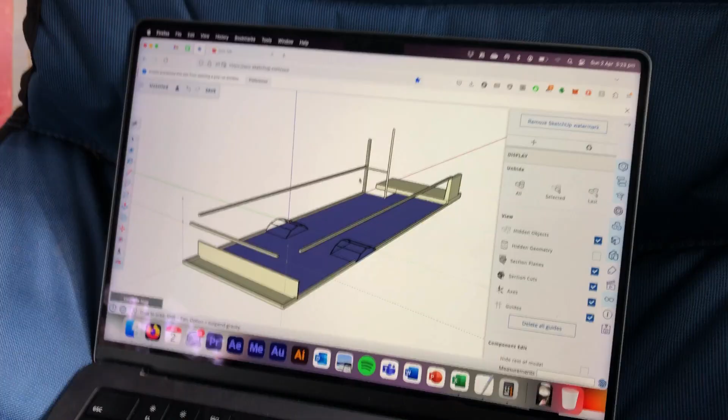So I've been busy, but there hasn't been that much to film. I've just been crawling around on my hands and knees taking measurements. What I've ended up doing is actually started to make a model of the bus for the floor plan. I'm not drawing the existing bus, only the features I've got to work around, such as the wheel wells here and the steps. The rest of it is all going to be framing. I've put in the roof ribs. I think this is going to be super useful.

Good Friday, Easter long weekend. The weather has turned very wintry, so the main thing we're going to check now is whether the bus is still waterproof.

So far, so good. Hang on, oh what? Let's see where it's come from. Water there as well. Alright, well, two spots, got one in the middle, one in that corner. Front's good though, that was really bad before, so that's a win.

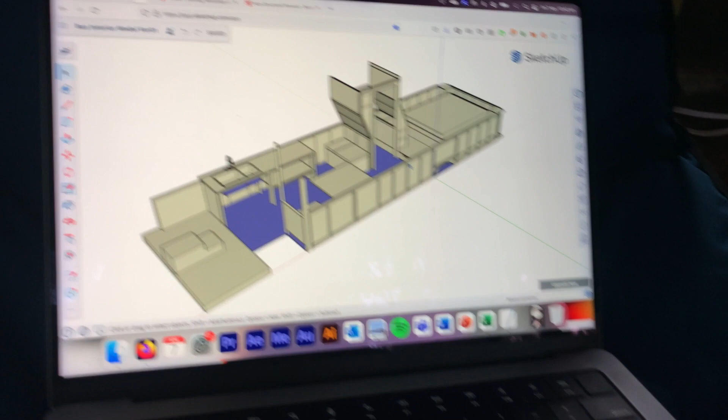So the main aim today is to double check and cross check the model I've been working on all week with the actual measurements of the bus, just to make sure all the timber we've got to order is going to fit properly. It's just going to be a case of going through this bit by bit with a tape measure, and accounting for it all in a spreadsheet. Very dull, very boring, but necessary.

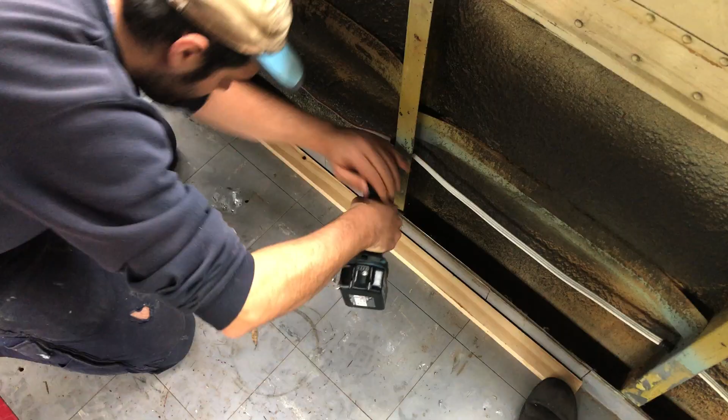Alright, so that's it, full day's work. What did we get done? Just that - the rarest piece of timber. All we could find was one piece of 42 by 30, which is what I've designed in for the entire floor plate and top plate for these walls. We went to five different hardware stores, none of them have it in stock, just one piece. So that's the day, and I guess we've got to wait until we can get some more.

So even though we could only get one length of this, we did manage to get all the 30 by 30s that we need. So this will be all the uprights right along the wall, and all of this as well, which is the 1745, and this will be the frame for the bed, the whole bed area. So semi-successful, but we can't start cutting this up until we've got the top plates in, which of course is the 42 by 30. We'll have another one of these up here, and then the uprights will fit between.

So we've got our walls in all the way around. Good feeling.

What we still need to do is work out what we did at the back there, because we're still getting water and we don't want to put anything down just yet, so we'll sort those leaks out. And then this will also have framing put in. Once we've done that, we can finalise where we're going to put all the power outlets. We're thinking of dragging these back, having one there, and we'll pull the kitchen ones back as well. It's a little bit to reshuffle, but after that, we can then give it a good clean and start insulating.

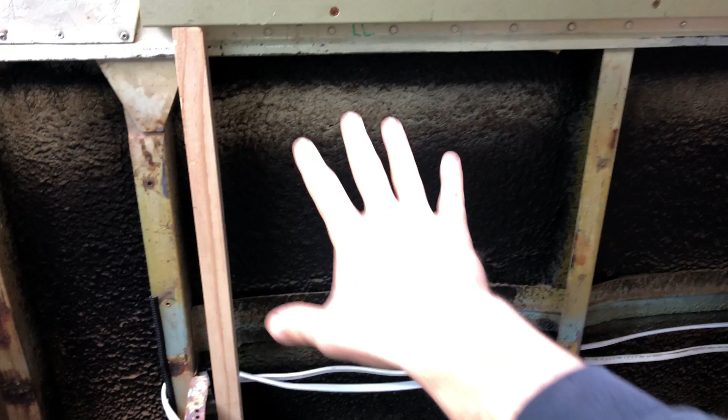First things first, cup of tea. So mainly I want to get all this cleared out - you can see it's just full of swarf and bits of bird nest and stuff, so we'll clear all that out and down the bottom as well. Then I'll start filling in those areas with the spray foam, see how far I can get with that before I run out. And then we're going to try and modify those spray cans so they actually shoot a fan. They're not designed to do it, but I've seen a video on YouTube of a guy who's managed to clamp the nozzle and make that work, so it might be our best bet. Another thing I need to do is pull back the power points here so they're at the right position.

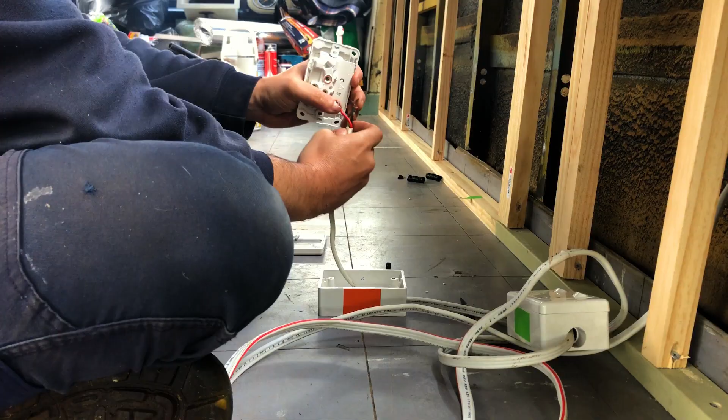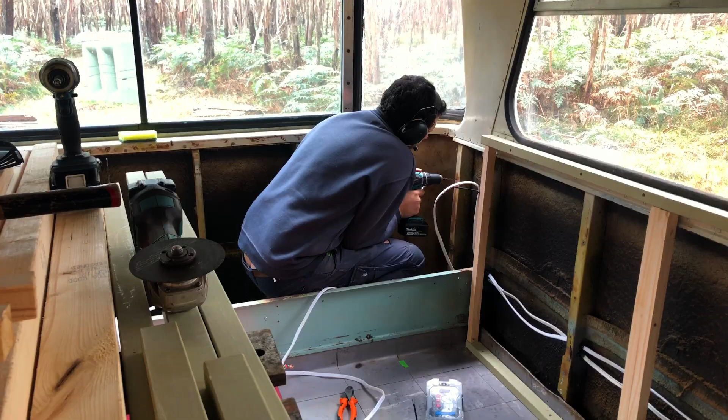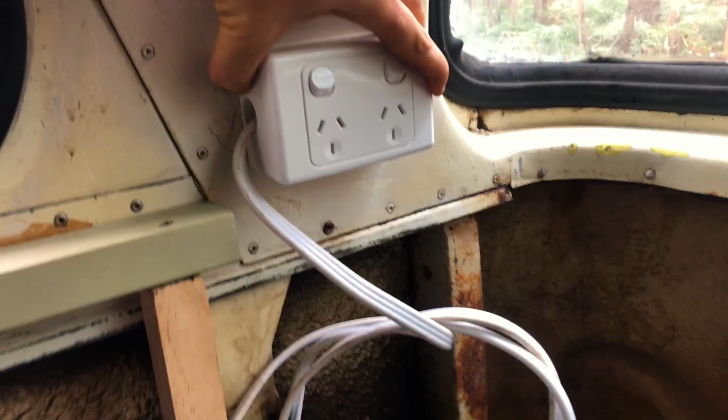Okay, well that's the kitchen one done. I think that's going to be a much better place for it. Let's move on to the bedroom ones. And there we go, so that one will go there. Rerouted all of that, and then the other one will be mounted on the other side there. So yeah, quite happy with that - I think I'm set on this being the final position for these.

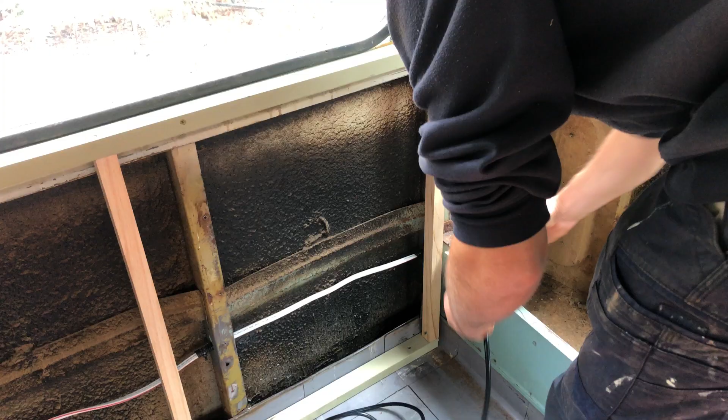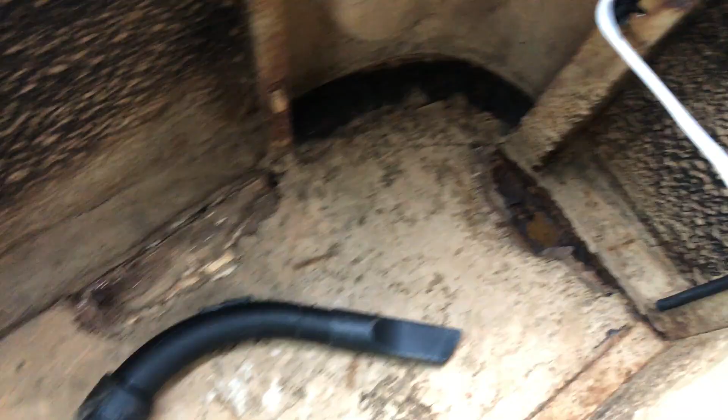Hoover straight through the floor - it's rotten through. This leak was left to work its way in for decades and it wasn't addressed, so now we've got a fairly big problem on our hands. What a nightmare.

And I am sweating, bloody hell it's hot in here. Getting a load of old junk out. Almost ready to start insulating, I'd say. I'm going to start down the bottom, and then once I get better at handling the gun, I'll do the top stuff.

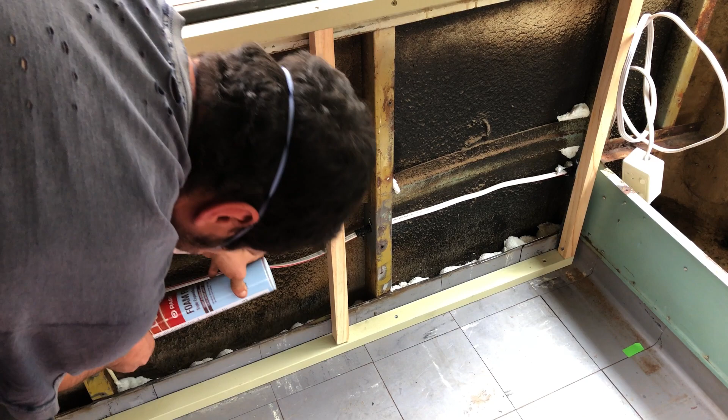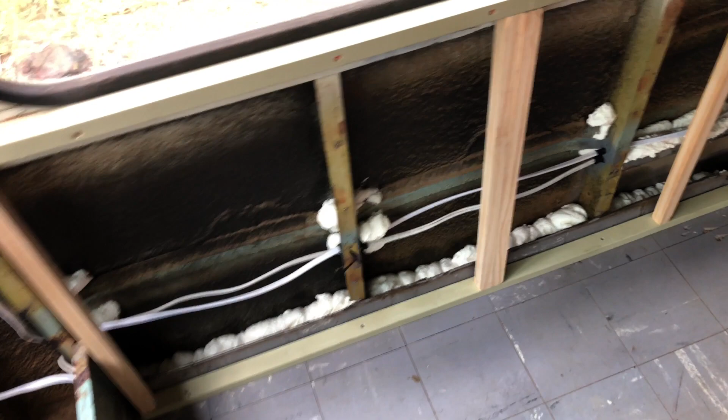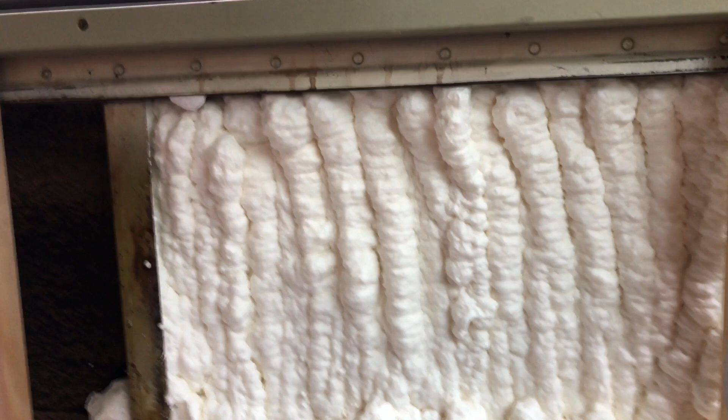Well, it went on. It wasn't quite as wide a fan as I was hoping for, but I think that could probably be down to the shape of the nozzle that I've made. If it was tighter, that should go out wider.

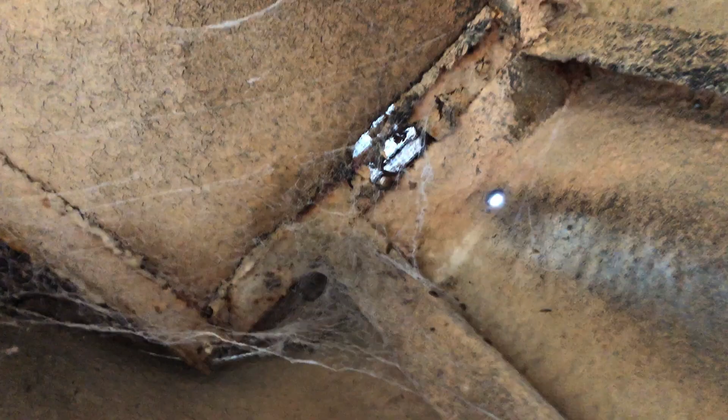So before I go home, I'm gonna have a look at this hole in the back of the bus here. Yeah, not great - the equivalent piece on the other side, that's all rusting as well. They both need to come out, unfortunately. Yeah, bad news, I'm gonna have to figure out a plan for this. Yeah, a bit of a shame that, I thought it was all going too well. It's gonna be something, right?

It's the following week. I've been to the steel supplier and picked up some angle and some flat, and that will go into the back of the bus. Yeah, look at that, the size of it. Brilliant.

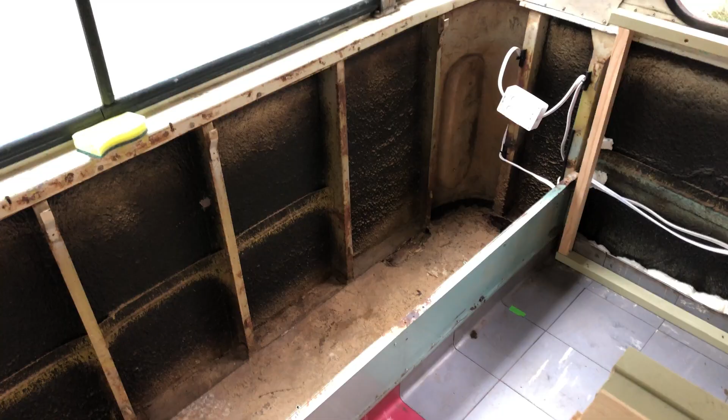Yeah, rock solid, perfect. I want to try and sort the leaks out - it's been dry the last 3 days. I want to use the opportunity to try and see if I can finally fix these bloody leaks. And then if I feel that's been sorted out properly, I'll have a crack at pulling all this up.

I've just gobbed it in everywhere - put it on, in between the seals, all around the seals, above, below the seals. It's a horrible job, but anyone who's tried to do anything like this before knows that when you get to this point, you're just desperate. I know the solution is new seals, but I just can't find them in this size anywhere. And I don't want to have to take them out and get them measured, because then I'm without a window for God knows how long. So this will have to do.

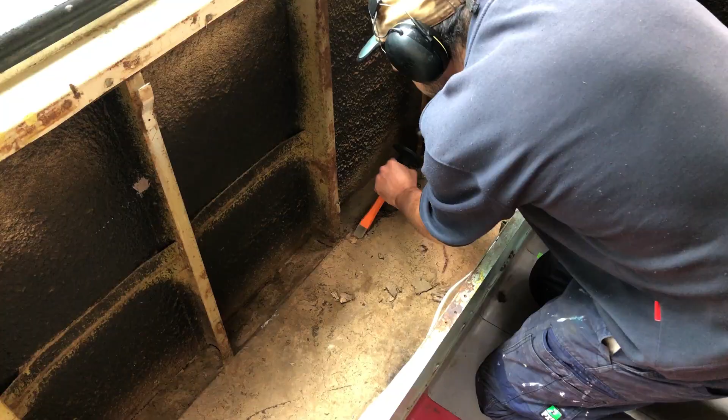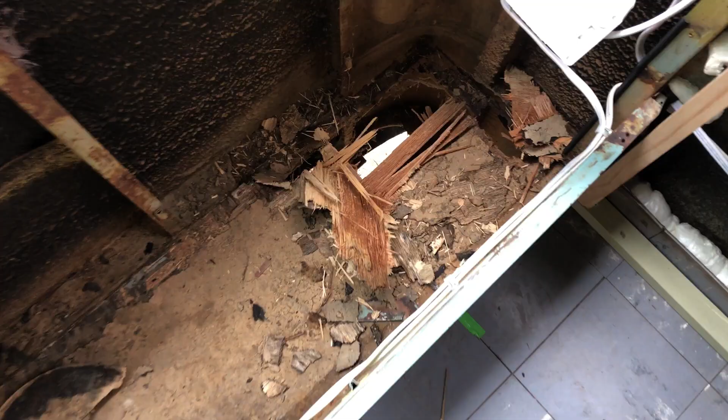Been hammering away at this for about half an hour or so. I've uncovered all the bolts that run through to the steel underneath, so I'm just going to zip them off with the angle grinder and hopefully I can lift it out.

I've tried to cut through all the screws, still not budging, everything's just fused in. And on top of that, they've covered the whole thing in bitumen, so it's all completely under that - none of the screw heads are visible or accessible anyway. My patience has run out with this thing.

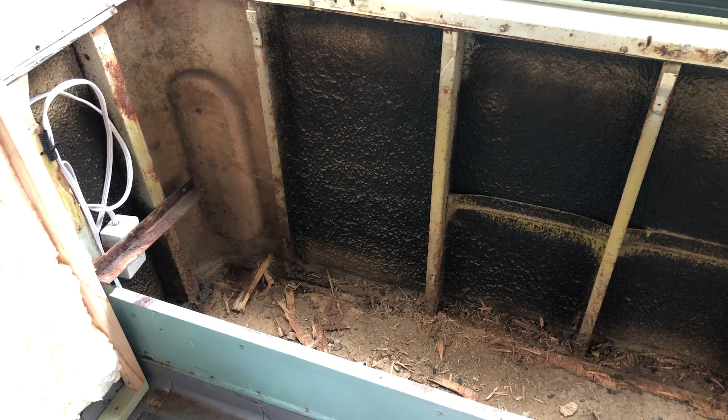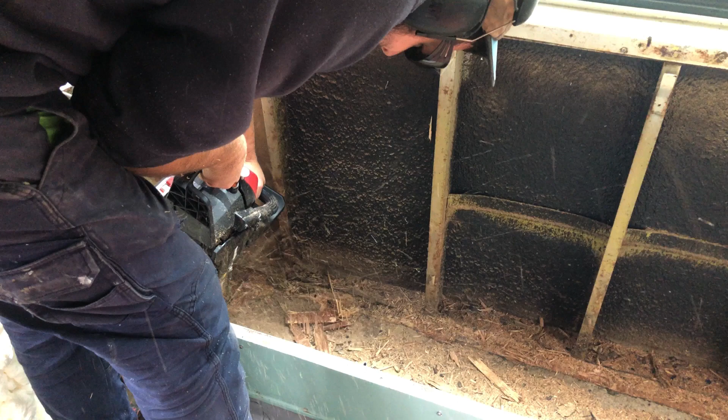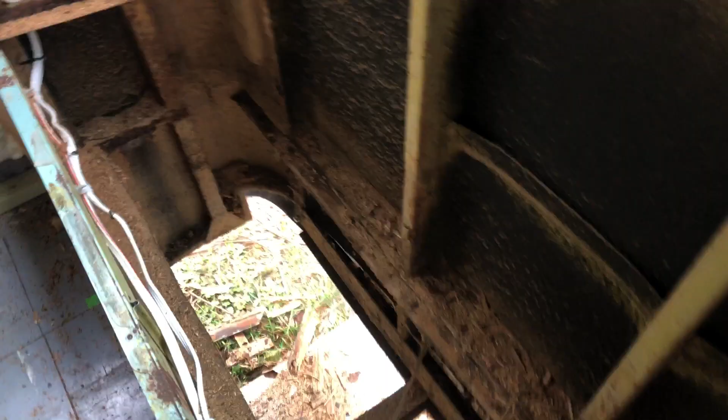Right, now my lungs are filled with sawdust and asbestos, feeling much better. The first thought was to just replace what's here, but this side is still solid because it was furthest away from where the water was getting in. So you can see the ply is still there.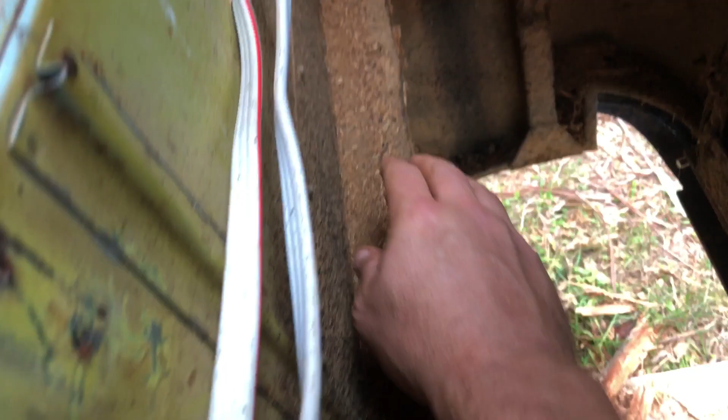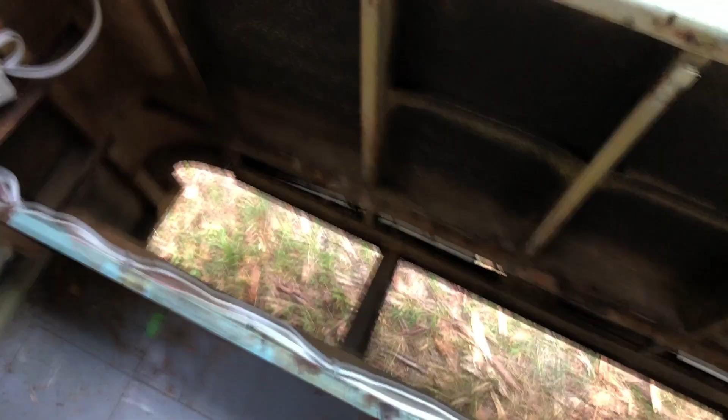I can either spend a couple of hours trying to take it apart as neatly as possible because I don't want to damage all the way around here. But there's no reason for it to be at this same height, so if I lifted everything up, that should be healthier metal to weld into, and will save me a lot of work trying to clear out all of this stuff. I'm gonna go and have a think about where I want to put this. It's just started to rain right on time. I'm gonna head off, come back tomorrow, see what we can do.

I've just picked up plywood for the floor. It's my last little bits for the metal, and it's pissing down. Today's gonna be absolutely miserable. Man, it is drenched.

Oh, I'm nervous. Okay. Oh, bloody hell, and now it's coming in there. I'm so sick of this. This side's all dry, well, that's good.

That was the worst of the original leak, so at least that's okay. This has been stemmed, but it's still coming through just a little bit, just a dribble. And now that's come out of nowhere.

Sick of it. So I left yesterday saying I was going to go home and think about how I'll do the metalwork and where I'm going to put the floor. But I got home, had a beer, and promptly forgot about it. Back to the original thinking, rebuild it higher up. I'm thinking where these tabs are, this is about 100 mil up, and we'll just rebuild as it was, and then I'll cut the ply.

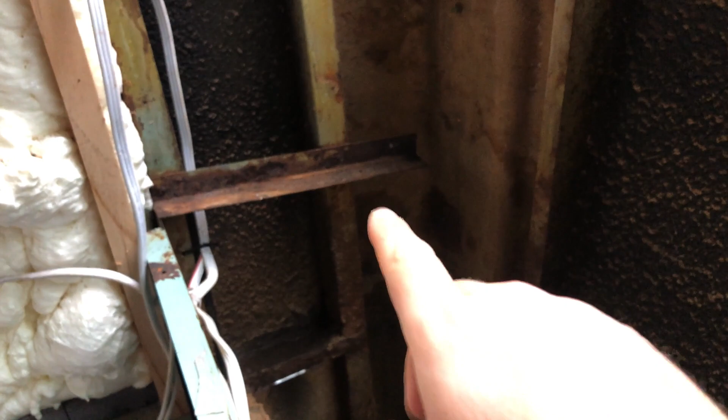The intention at the moment is to cut the ply so it kind of goes in and around all of these. I think that's probably the best bet. So first things first, let's take all this cabling off, get that out of the way. I'll cut out that bit of angle that's doing nothing. Yeah, start measuring up and then maybe cut some metal to length.

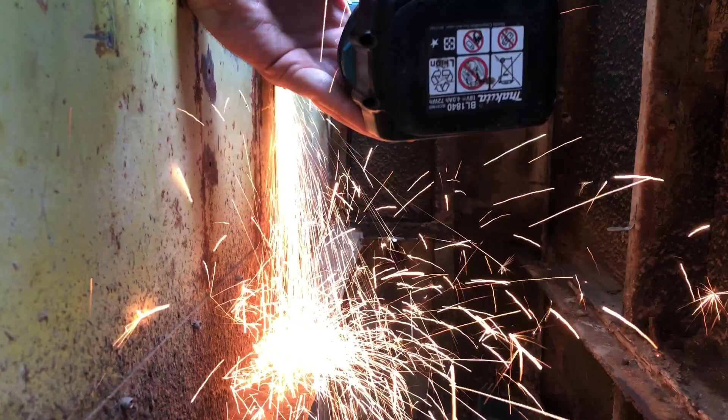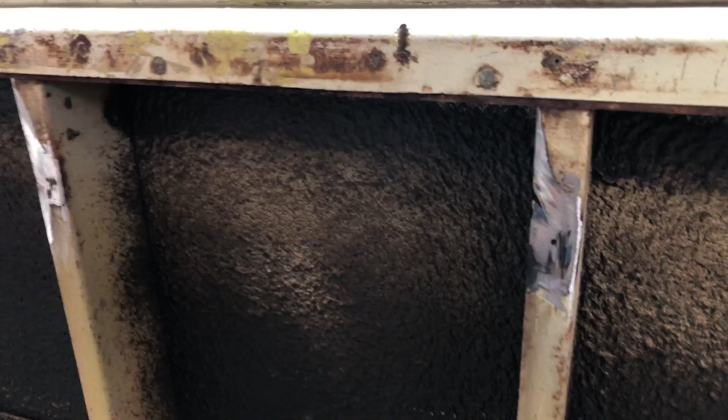All these tabs have been zipped off now. I've cleared all the cabling out of the way, taken the L bracket off that was there. So I've just marked out where the new metal will go in, so I'll take a flap disc to all of that, clean it up, and that should be ready to weld to, and then I'll start cutting the length.

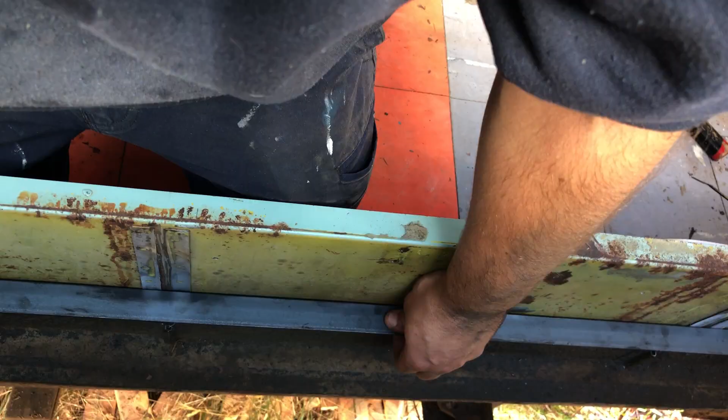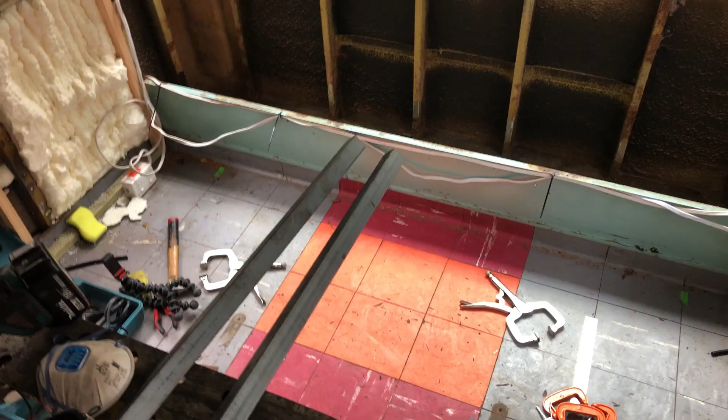Spot on. Less than 1 mil of play. Nice, alright, one of four. Alright, well that's both the long pieces cut now, fit well.

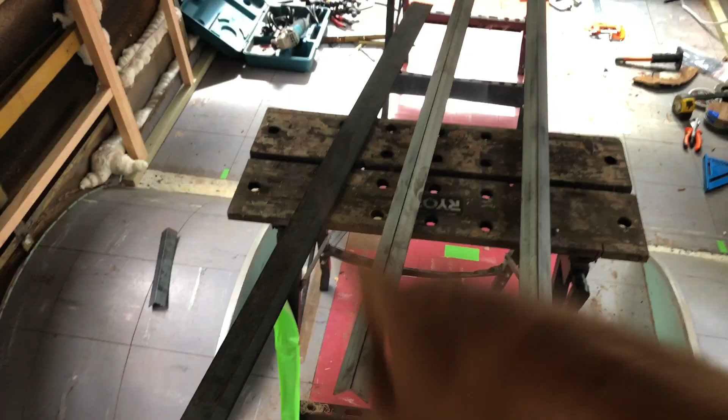I've got a plan for the flat bar as well, to bridge between them. It would have been nice to have an angle all the way around with a nice mitre join at each corner, but the offcuts just aren't long enough, unfortunately, and these were the lengths I had available. I got that flat bar out of the scrap bin, so it cost me very little. I'll make it work. Gonna have some food and come back to it and stitch it in, I reckon.

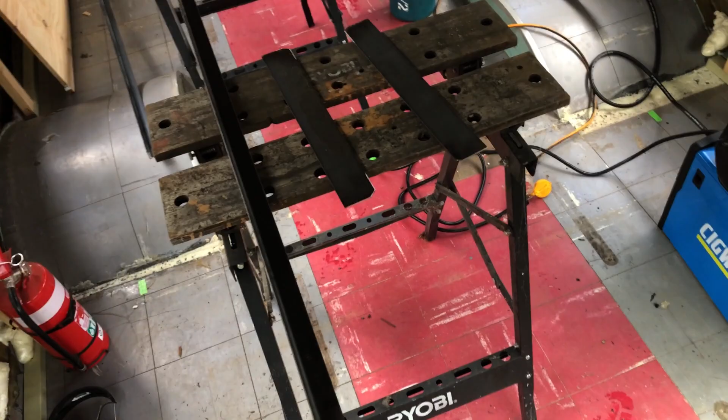Well, the loud machine's been fired up outside. See if we can get this all pieced together. These flat bars I'm just gonna put in like this, and they'll go across to each side that way and be welded up against that as well. Not perfect, but more than enough for this.

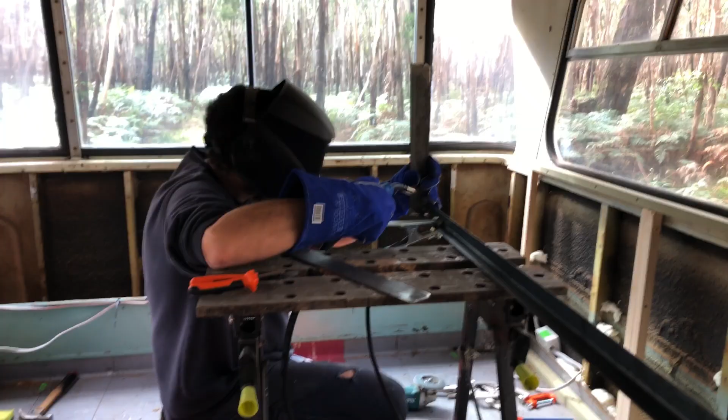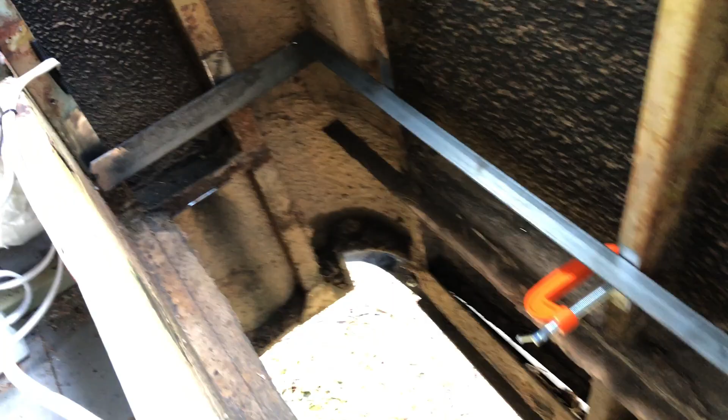So hopefully this illustrates what I'm trying to do. I've already welded on these side bits here, still don't have one on this side yet. Yeah, a couple of issues. So this comes out a lot further than this, so I'm gonna have to kind of bend that round. It's all right, there's still loads of flex in it.

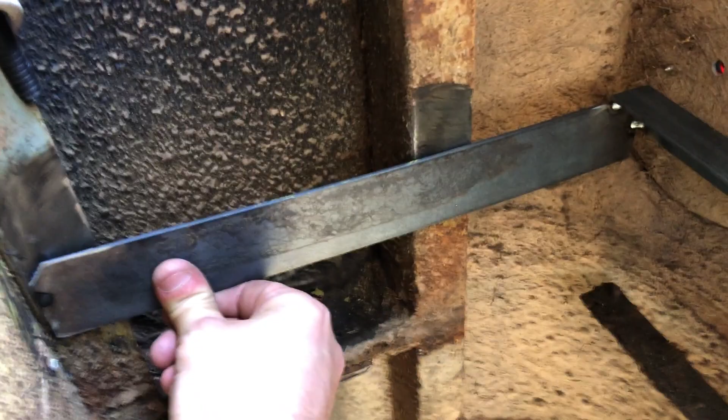These are just tack welds for now. The other side isn't flush, but will just need to be kind of lifted up a little bit. That's all fine, and then I'll weld it in each spot. And because I can't clamp over this, it's just too deep, I'll weld all this in, and then I guess I'm just gonna have to kind of put the other piece in and hang it on each side.

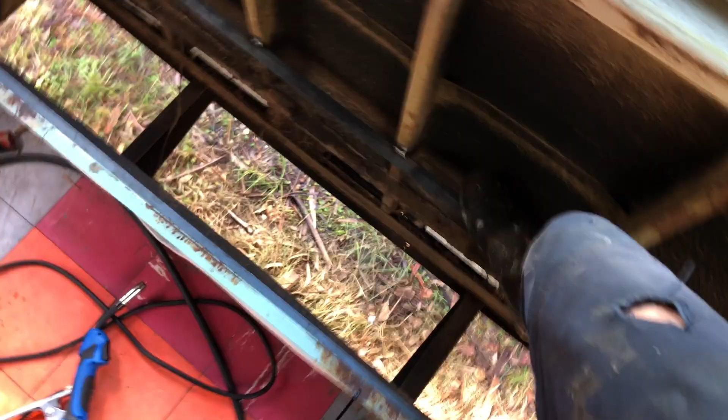Okay, so the frame's in, and it is strong. Going nowhere.

Factory finish, better than new, that. Onto the wood while that paint's drying. Have a measure up, try and draw what's needed.

There it is. Had to do a little bit of nip tuck, just trimming these to follow that curve. But otherwise, went in okay. That's rock solid now, so I can stand on this.

We'll still keep trying to fix the leaks. I won't leave this in here now. Doesn't take much to fasten this down. But I'm glad I got that done. It's ready just to go in once we sort this leak out. That's me being optimistic.

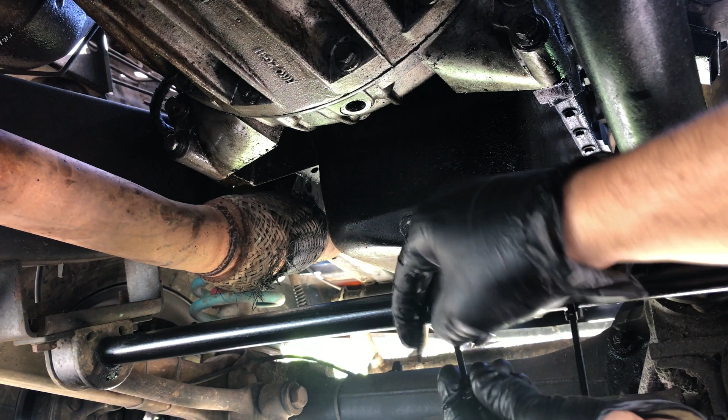I'm not under the bus, this is the Land Rover. I think that's about as much as we'll get done on the bus this month. The weather's good, so I'm taking the opportunity to give the disco a service.

We heard from the planning department at the council, and it all sounds like it's gone through quite cleanly. They're just gonna get it to the senior person to give us that last stamp of approval, and we're expecting to get our planning permit imminently.

Genius British engineering. Well, like I say, I don't think we're going to get anything more done this month, so I'll leave it there, and hopefully we'll be able to get more done next month and start getting these trees cleared. Fingers crossed. See you then.